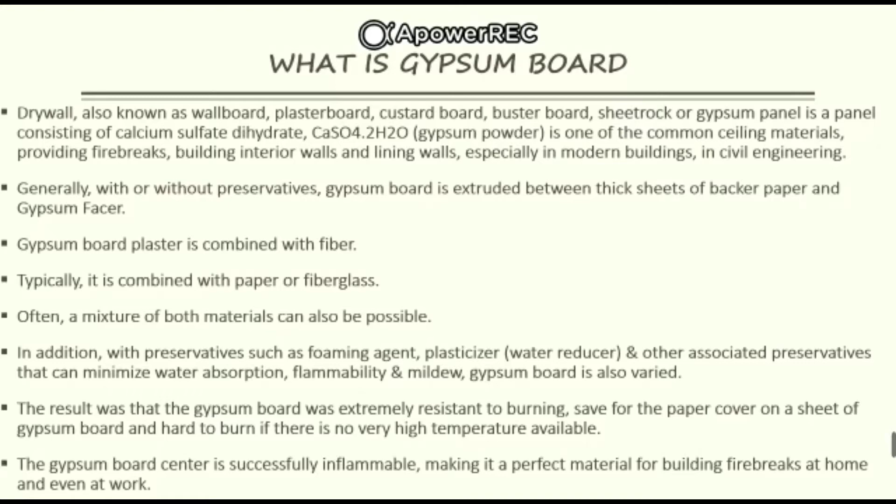History of gypsum board. The United Kingdom's first plasterboard plant opened in Rochester, Kent in 1888. The Sackett board was invented in 1894 by two graduates named Fred Kane and Augustine Sackett of Rensselaer Polytechnic Institute.

By layering plaster inside 4 layers of wool felt paper, the Sackett board was made. The Sackett board measured around 3/16 of an inch, with open end edges, and was 36 inches square.

Gypsum board was developed between 1910 and 1930, beginning with the removal of two internal layers of felt paper in favor of paper-based faces and wrapped board edges.

In 1910, the United States Gypsum Corporation acquired the Sackett plaster board company. Seven years later, in 1917, Sheetrock was introduced. The gypsum board was further developed, providing installation efficiency, and has become a measure of fire resistance.

After that, the technology of air entraining made boards less brittle and lighter. In addition, there were advances in joint treatment materials and systems.

Gypsum lath used to be an early plaster substrate, a panel made of compressed gypsum plasterboard that was often punched or grooved with holes to ensure the wet plaster was able to key through its surface, as an alternative to metal lath or conventional wood lath.

It was faced with paper saturated with gypsum crystals as it progressed, which fused with the added facing layer of plaster. In 1936, this gypsum lath was labeled as Rocklath by United States Gypsum.

In 2002, the European Commission levied a total of 420 million euros in fines on the companies Lafarge, BPB, Knauf, and Gyproc Benelux, which had run a business cartel affecting 80% of the buyers in France, Germany, the United Kingdom, and the Benelux countries.

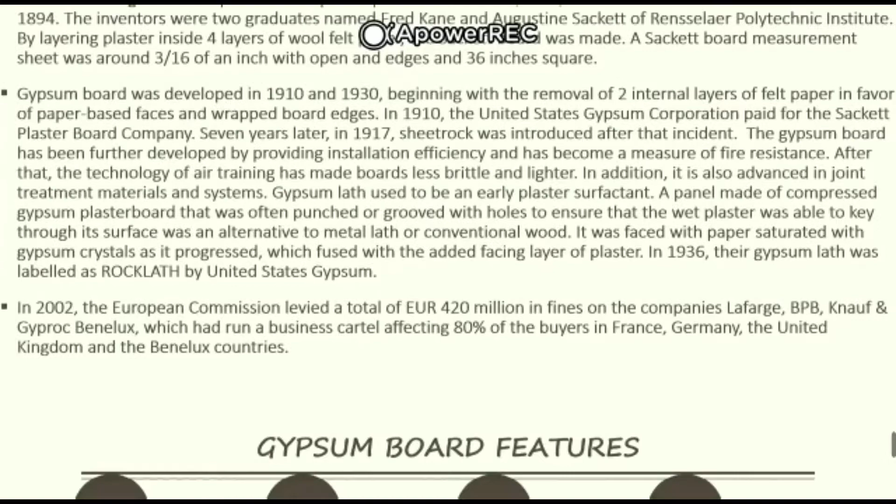Last one is gypsum board features. There are four main features of gypsum board: composition, toxicity, fire resistance, and gypsum.

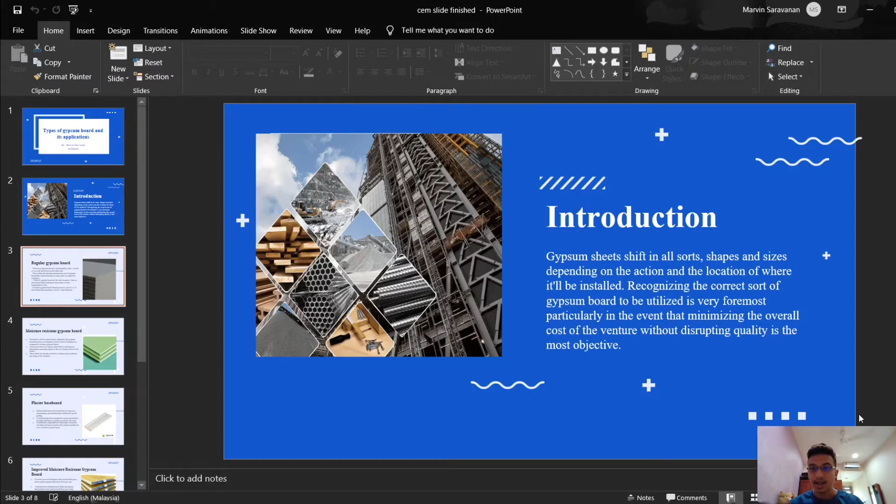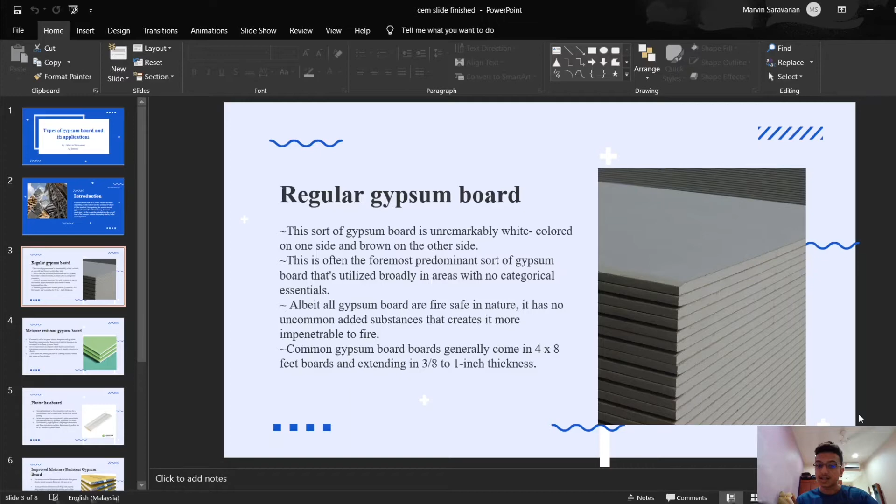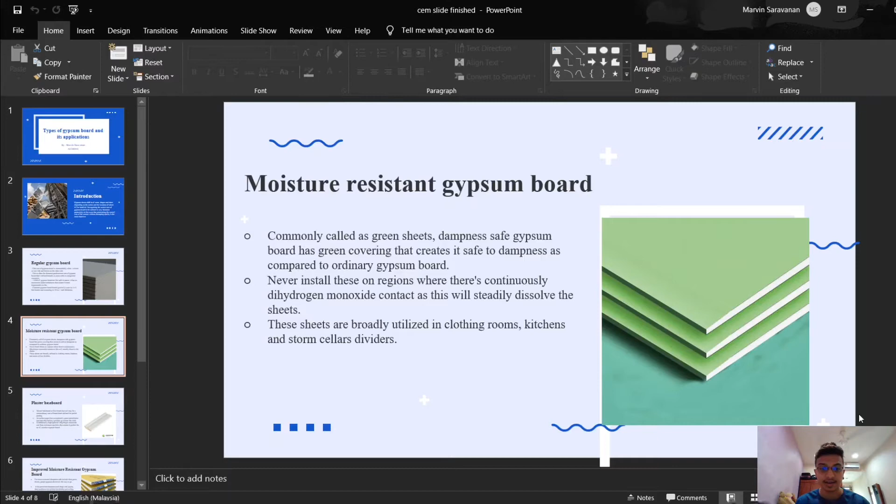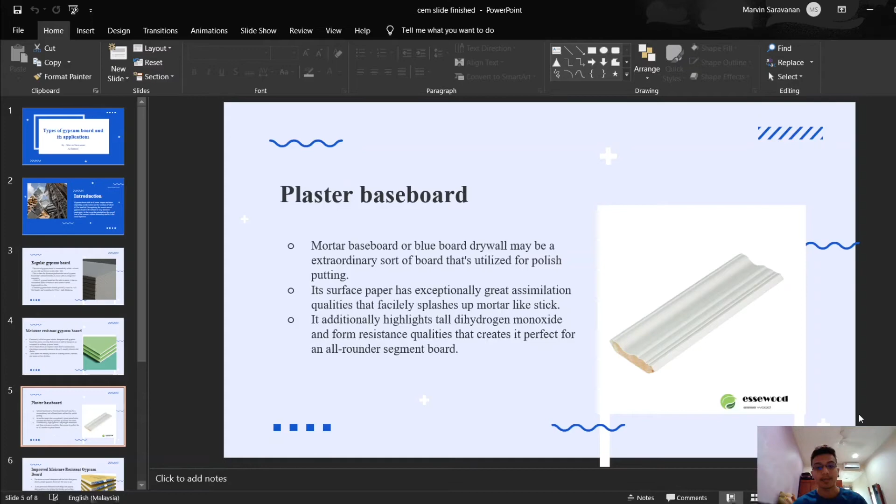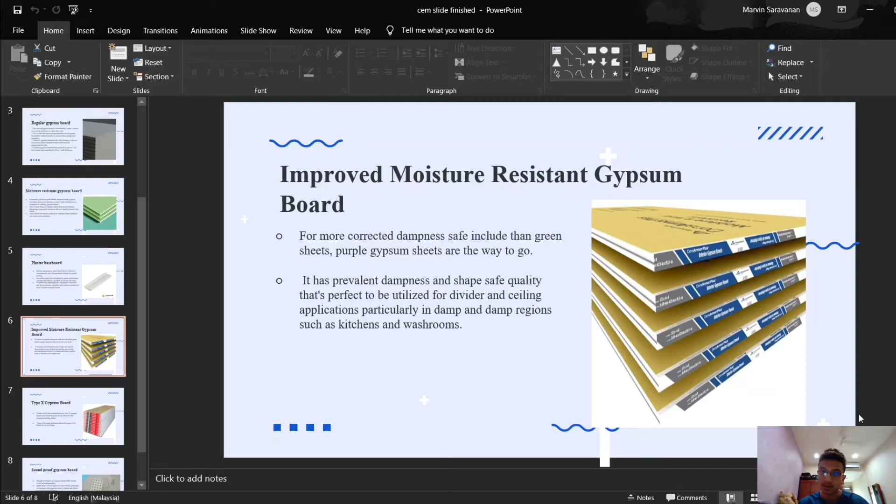Next up will be the improved moisture resistant gypsum board. For more enhanced moisture resistance compared to the green sheets, purple gypsum sheets are the way to go. It has superior moisture and mold resistant quality that's perfect to be utilized for wall and ceiling applications.

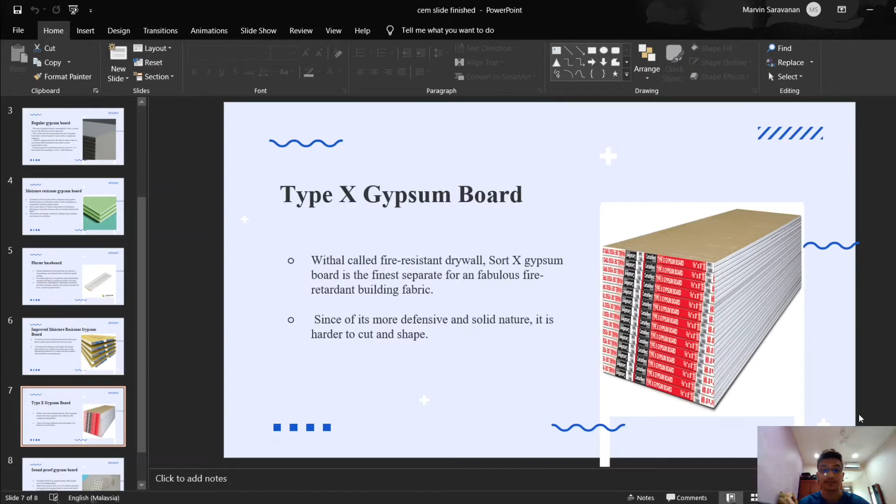Last but not least is the soundproof gypsum board. It's made from covered layers of wood strands, polymers and gypsum. Its prevalent soundproofing properties make it perfect for music rooms or recreation rooms, where loud sounds must be stifled efficiently.

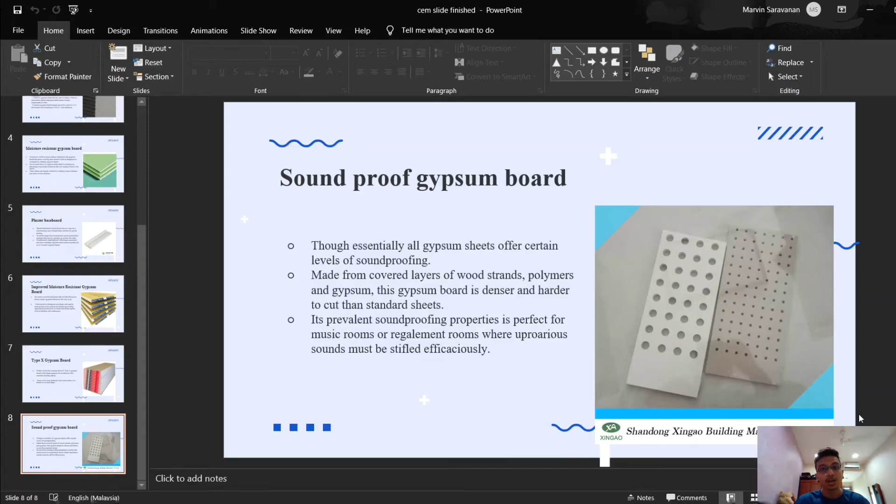Hi, I am Mas Izatumira binti Mas Wirasta and I'm going to present the manufacturing of gypsum board. There are 6 processes in manufacturing gypsum board, and we will go through them one by one.

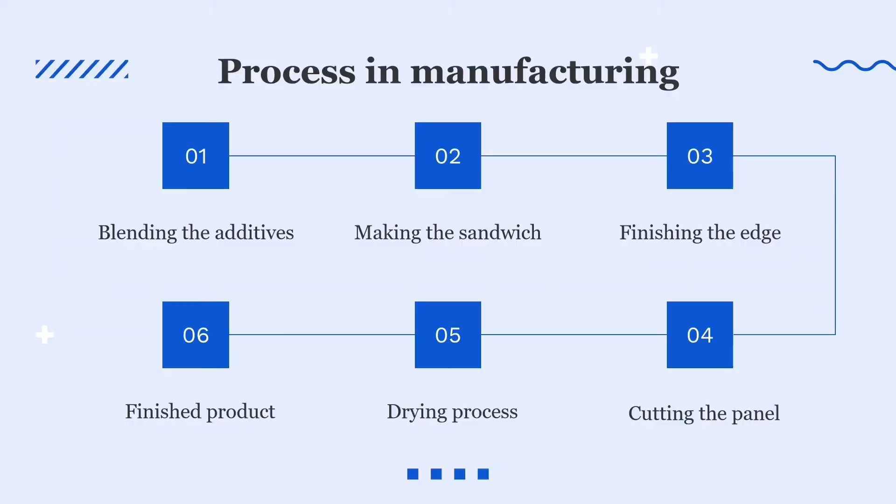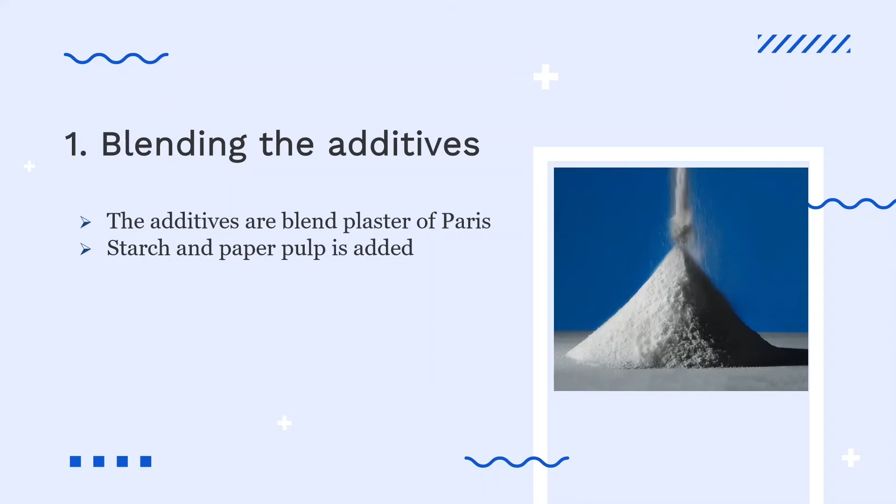The first process is blending the additives. It starts by blending the additive with plaster of Paris. To help the paper facing adhere to the core, starch is added, and paper pulp is added to increase the core's tensile strength. Water and asphalt are also added into the plaster of Paris, where the asphalt provides moisture resistance in the final product.

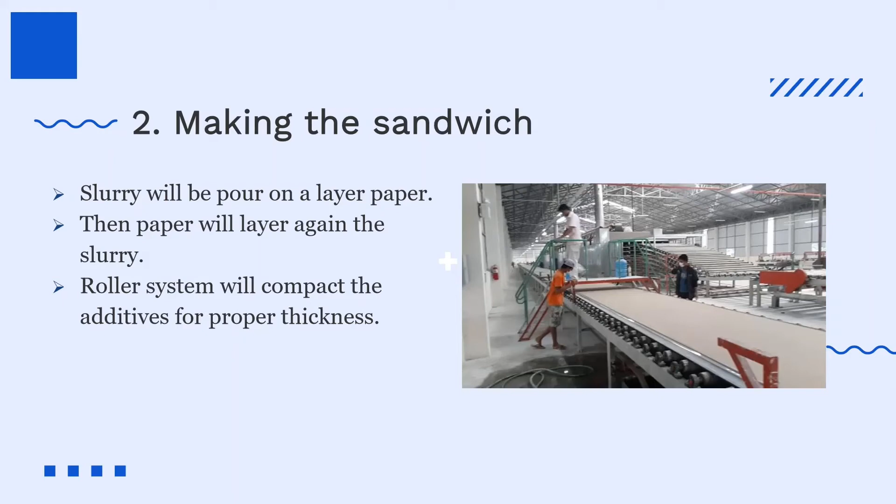The second step is making the sandwich. After blending the additives, slurry is poured onto a layer of paper, then another layer of paper is placed over the slurry. After that, it passes through the roller system to compact the additives for proper thickness.

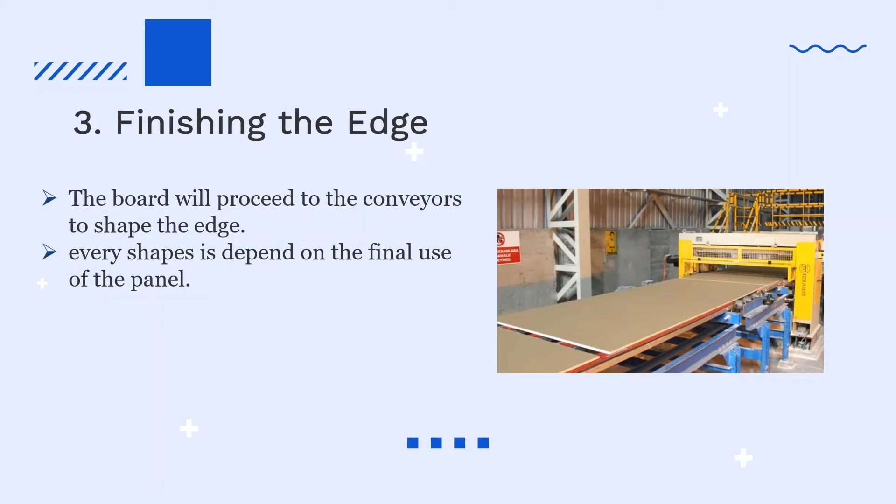The next process is finishing the edge. When the sheet hardens, the board proceeds to the conveyors to shape the edge. The shape of the edge varies depending on the final use of the panel.

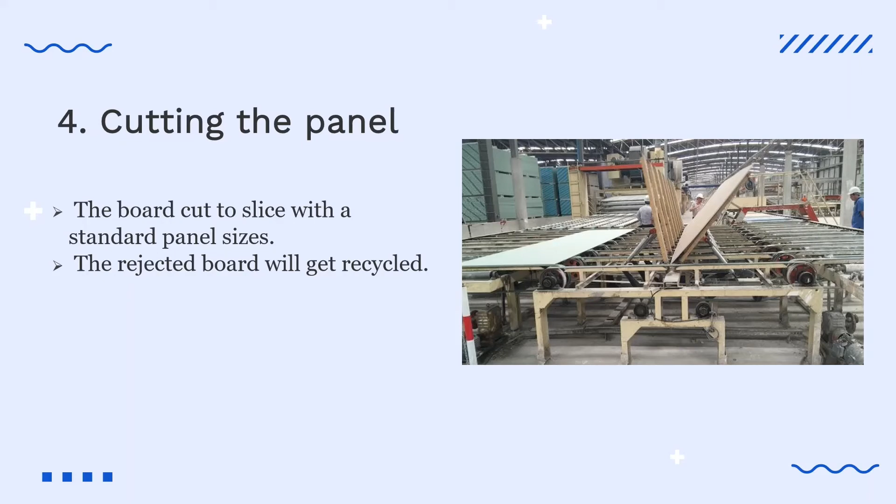The next process is cutting the panel. Once the edge of the gypsum board is shaped, the board is cut into slices of standard panel size. Rejected boards are recycled.

Next is the drying process. The board is transferred to the drying oven, passing through a multi-stage dryer. Humidity and temperature of the oven always need to be controlled.

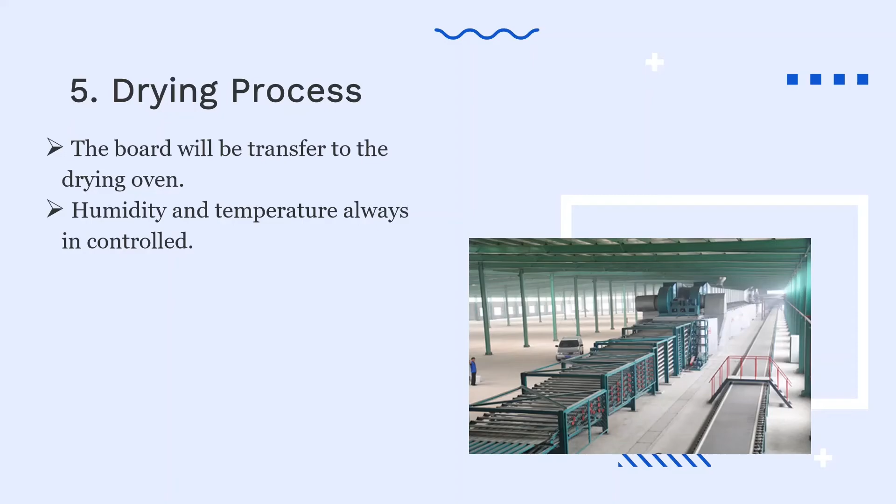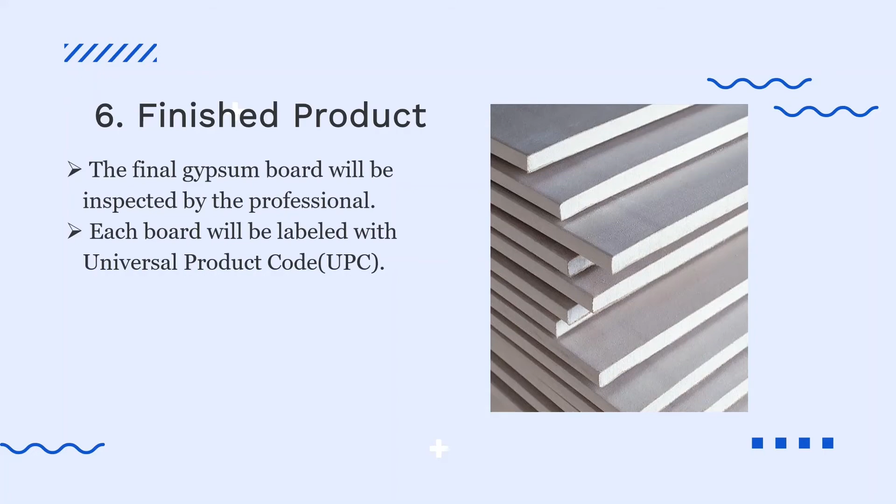My name is Muhammad Akmal bin Shahrul Kalam, and my matrix number is AF200-100. I want to talk about the product and the properties of gypsum board.

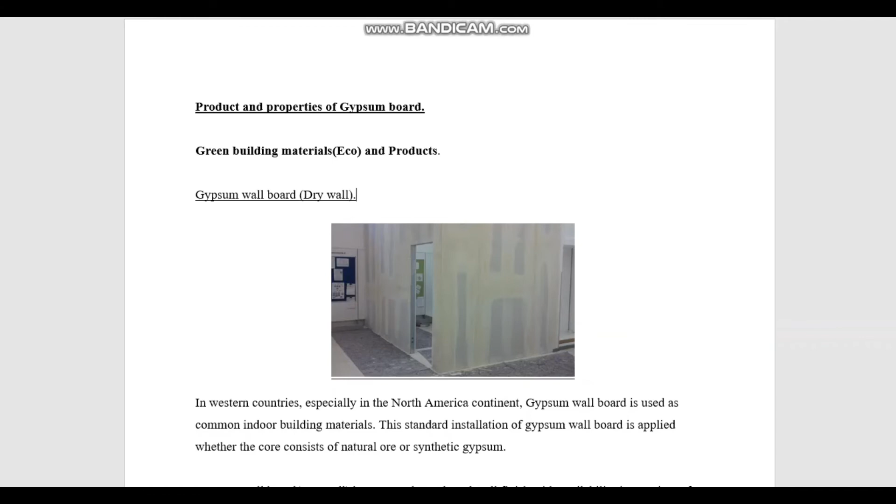In Western countries, especially in North America, gypsum wallboard is used as a common indoor building material. This standard installation applies whether the core consists of natural or synthetic gypsum. Gypsum wallboard, known as a plaster-based wall finish, is available in a variety of standard sizes. The most common drywall is 4 feet wide by 8 feet high. It is also known by its proprietary names, drywall and sheetrock, commonly found in construction.

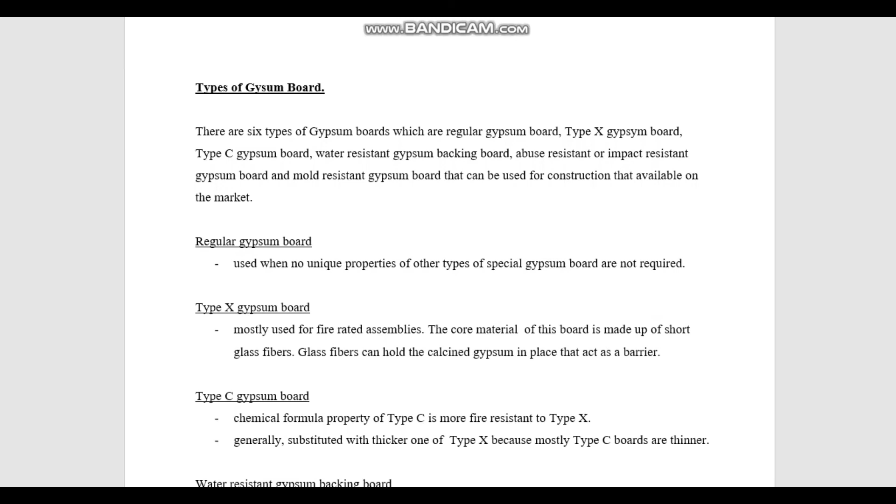There are 6 types of gypsum board. The first is regular gypsum board, used when no unique properties of other special gypsum board types are required. Type X gypsum board is mostly used for fire-rated assemblies.

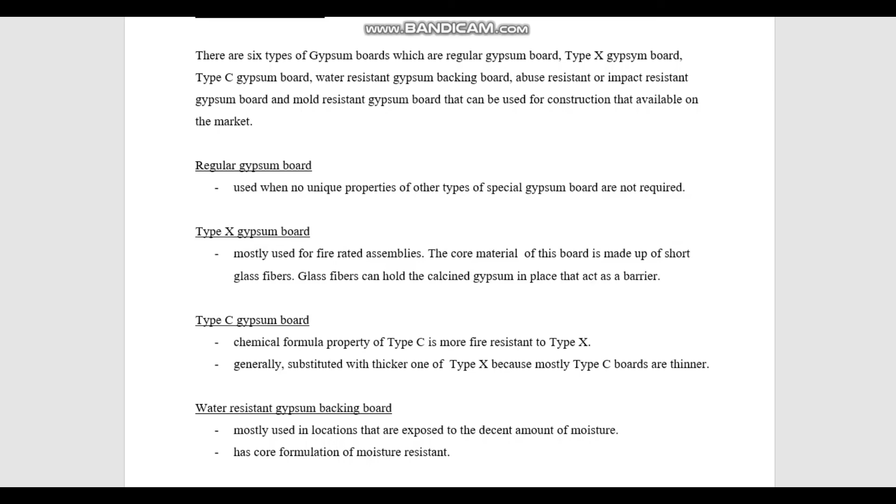The core material of Type X board is made up of short glass fibers. These glass fibers hold the calcined gypsum in place, acting as a barrier.

Type C gypsum board has a chemical formula property more fire resistant than Type X, and is generally substituted for a thicker Type X board, since Type C boards are mostly thinner.

Water resistant gypsum backing board is mostly used in locations exposed to a decent amount of moisture, as it's formulated to be moisture resistant.

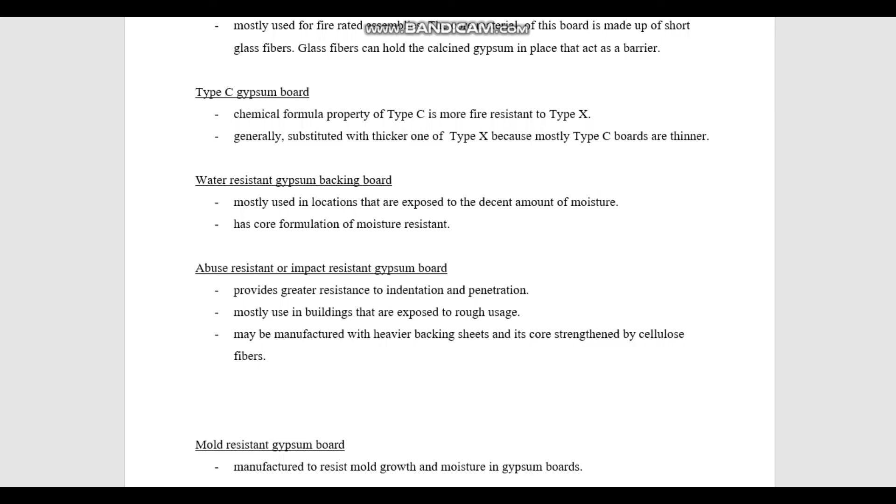Abuse resistant or impact resistant gypsum board provides greater resistance to indentation and penetration, mostly used in buildings exposed to rough usage. It may be manufactured with heavier backing sheets and is core-strengthened by cellulose fibers.

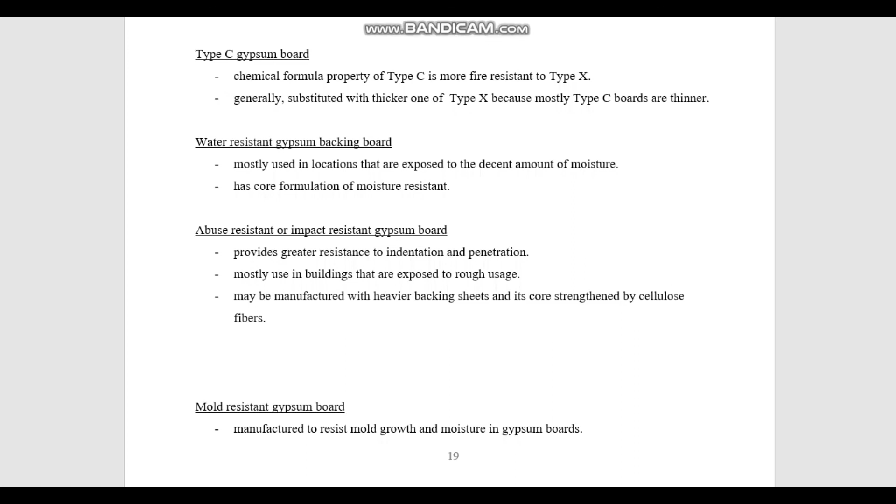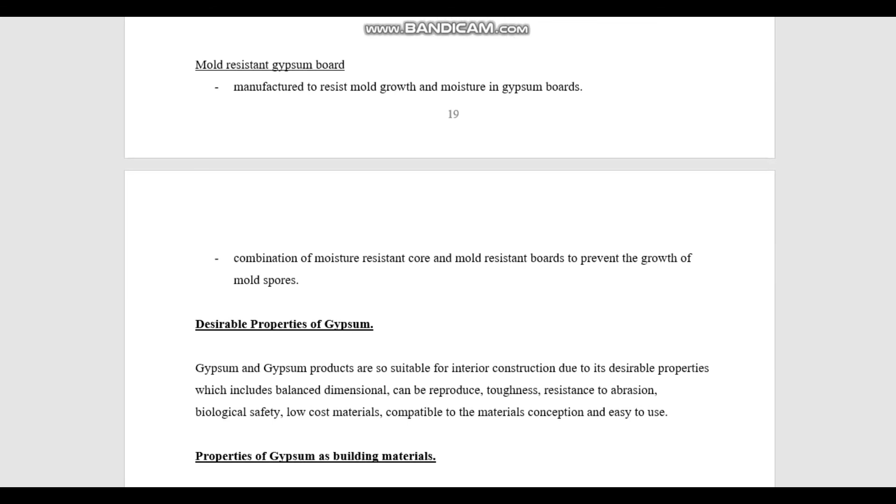Mold resistant gypsum board is manufactured to resist mold growth and moisture. It combines a moisture resistant core and mold resistant boards to prevent the growth of mold spores.

The desirable properties of gypsum: gypsum and gypsum products are suitable for interior construction due to desirable properties including dimensional balance, reproducibility, toughness, resistance to abrasion, biological safety, low cost material, compatibility with material conception, and ease of use.